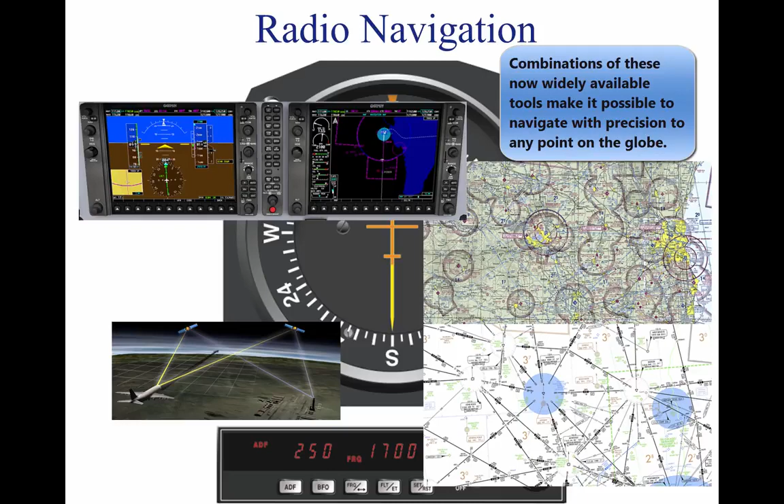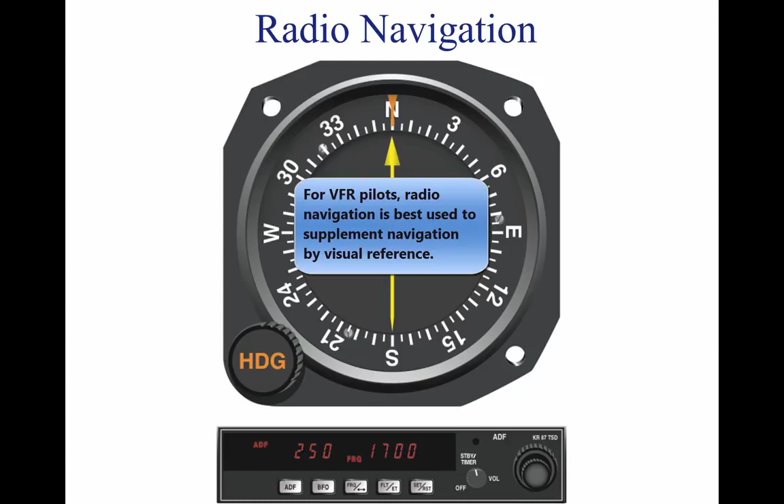Radio navigation. Advances in navigational radio receivers installed in aircraft, the development of aeronautical charts which show the exact location of ground transmitting stations and their frequencies, along with refined flight deck instrumentation, make it possible for pilots to navigate with precision to almost any point desired. Although precision in navigation is obtainable through the proper use of this equipment, beginning pilots should use this equipment to

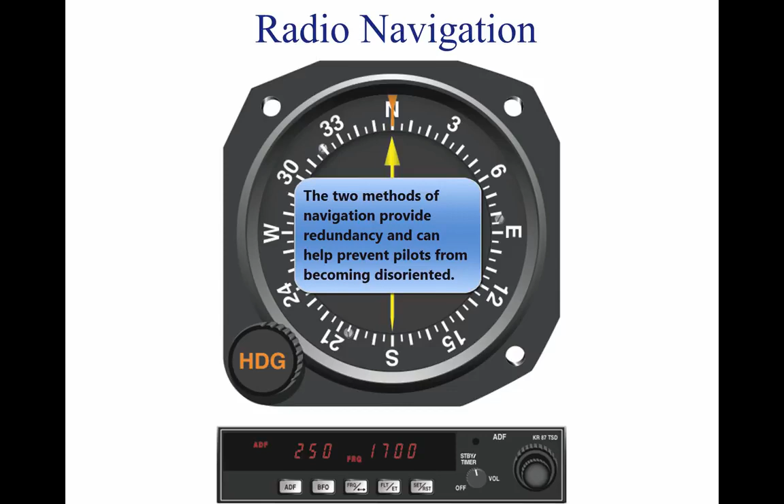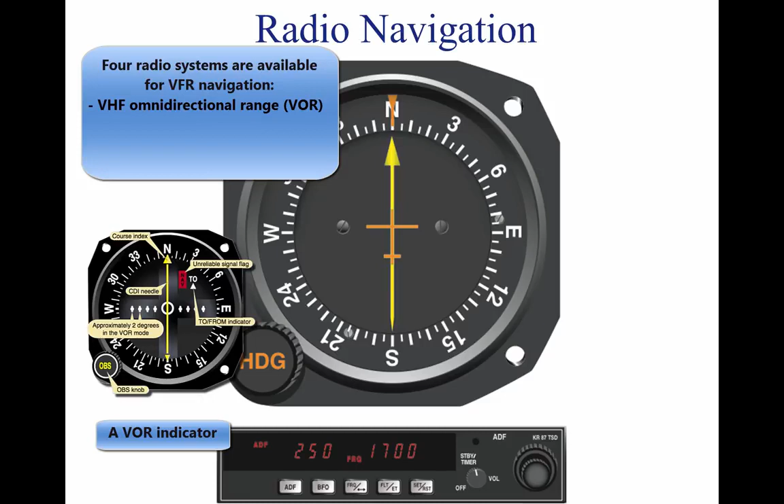supplement navigation by visual reference to the ground, pilotage. This method provides the pilot with an effective safeguard against disorientation in the event of radio malfunction. There are 4 radio navigation systems available for use for VFR navigation. These are VHF Omnidirectional Range (VOR), Non-Directional Radio Beacon (NDB), Long Range Navigation (LORAN-C), and Global Positioning System (GPS).

Very High Frequency, VHF Omnidirectional Range, VOR. The VOR system is present in 3 slightly different navigation aids, NavAids: VOR, VOR-DME, and VORTAC. By itself, it is known as a VOR, and it provides magnetic bearing information to and from the station. When DME is also installed with a VOR, the NavAid is referred to as a VOR-DME. When military tactical air navigation, TACAN equipment is installed with a VOR, the NavAid is known as a VORTAC. DME is always an integral part of a VORTAC.

Regardless of the type of NavAid utilized, VOR, VOR-DME, or VORTAC, the VOR indicator behaves the same. Unless otherwise noted in this section, VOR, VOR-DME, and VORTAC NavAids are all referred to hereafter as VORs.

The prefix omni means all, and an omnidirectional range is a VHF radio transmitting ground station that projects straight-line courses, or radials, from the station in all directions. From a top view, it can be visualized as being similar to the spokes from the hub of a wheel. The distance VOR radials are projected depends upon the power output of the transmitter.

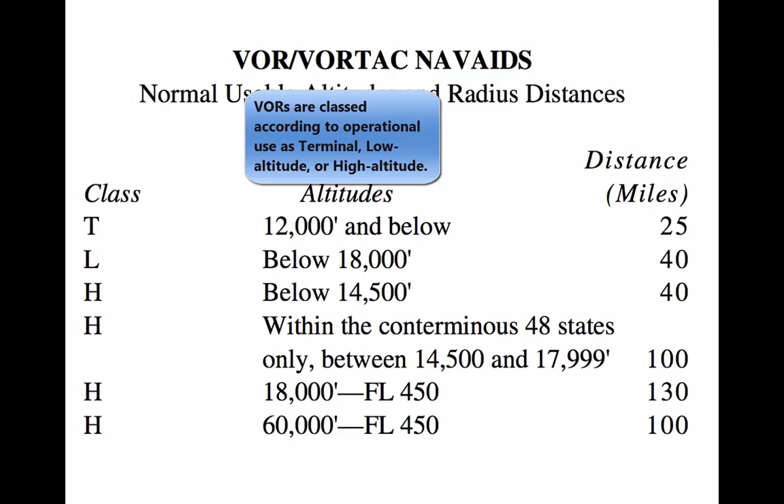VORs and VORTACs are classed according to operational use. There are 3 classes: T, terminal; L, low altitude; and H, high altitude. The normal useful range for the various classes is shown in this table. The useful range of certain facilities may be less than 50 miles. For further information concerning these restrictions, refer to the Communication NavAid remarks in the AFD.

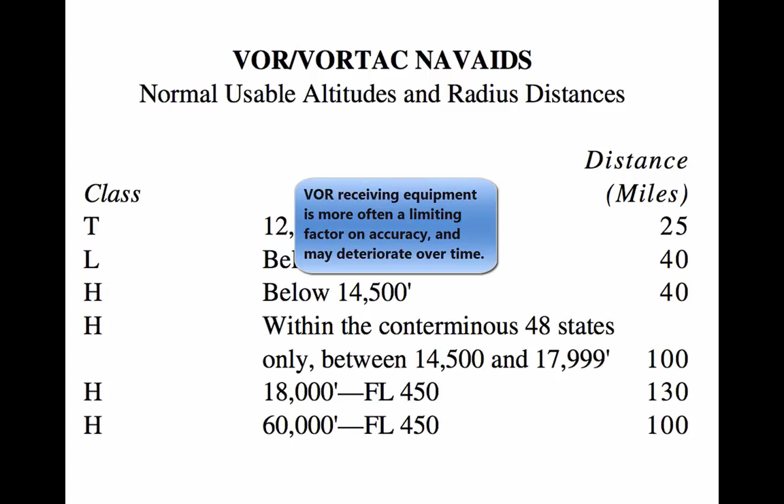The accuracy of course alignment of VOR radials is considered to be excellent. It is generally within plus or minus 1 degree. However, certain parts of the VOR receiver equipment deteriorate, and this affects its accuracy. This is particularly true at great distances from the VOR station. The best assurance of maintaining an accurate VOR receiver is periodic checks and calibrations.

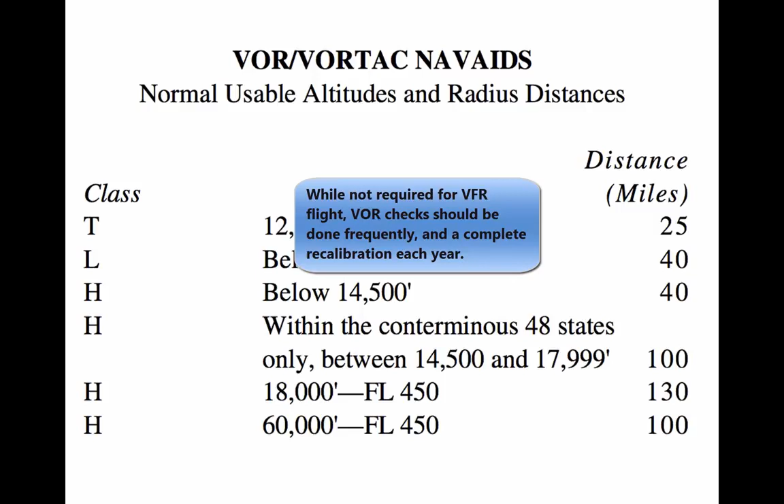VOR accuracy checks are not a regulatory requirement for VFR flight. However, to assure accuracy of the equipment, these checks should be accomplished quite frequently, with a complete calibration each year.

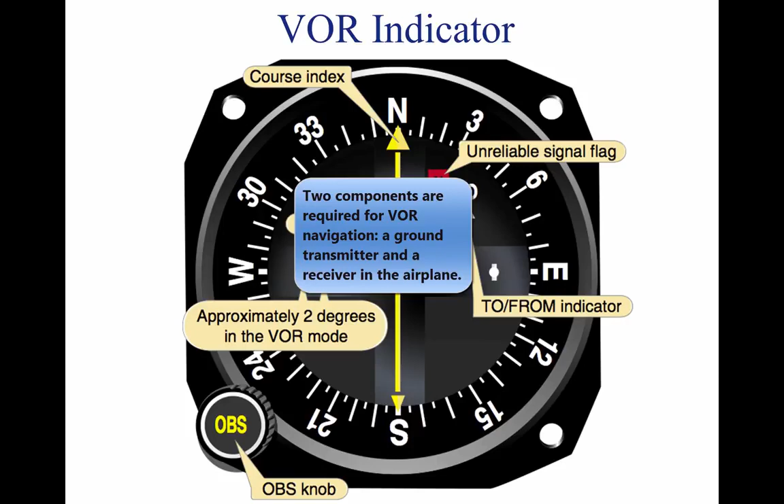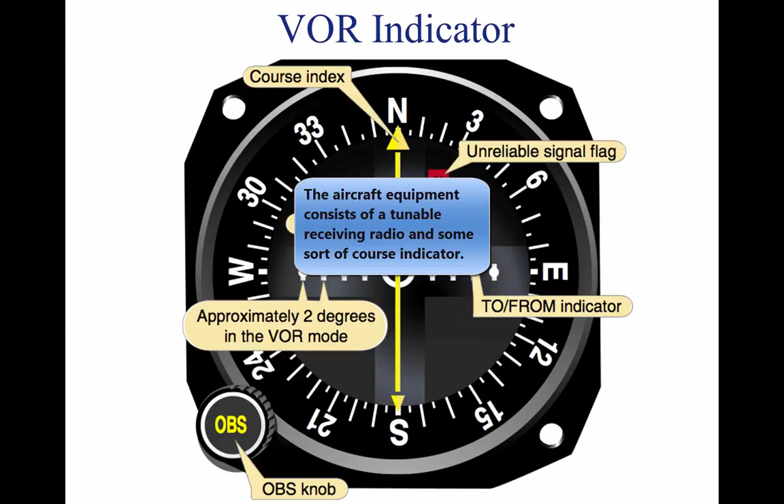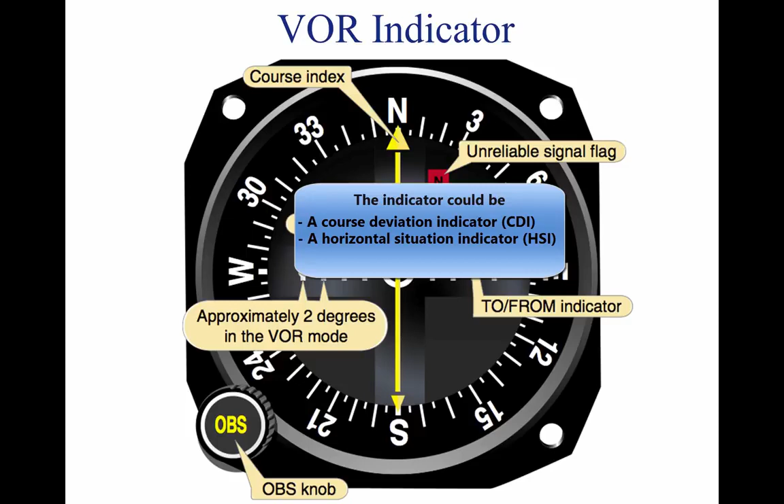Using the VOR. In review, for VOR radio navigation, there are two components required: ground transmitter and aircraft receiving equipment. The ground transmitter is located at a specific position on the ground and transmits on an assigned frequency. The aircraft equipment includes a receiver with a tuning device and a VOR or Omni navigation instrument. The navigation instrument could be a course deviation indicator (CDI), horizontal situation indicator (HSI), or a radiomagnetic indicator (RMI). Each of these instruments indicates the course to the tuned VOR.

Course deviation indicator. The CDI is found in most training aircraft. It consists of: 1. Omni bearing selector (OBS), sometimes referred to as the course selector, 2.

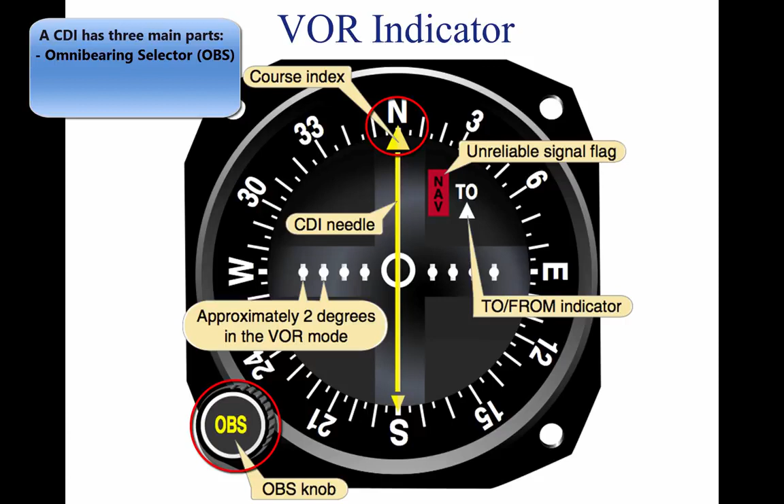A CDI needle, left-right needle, and a to-from indicator. The course selector is an azimuth dial that can be rotated to select a desired radial, or to determine the radial over which the aircraft is flying. In addition, the magnetic course to or from the station can be determined.

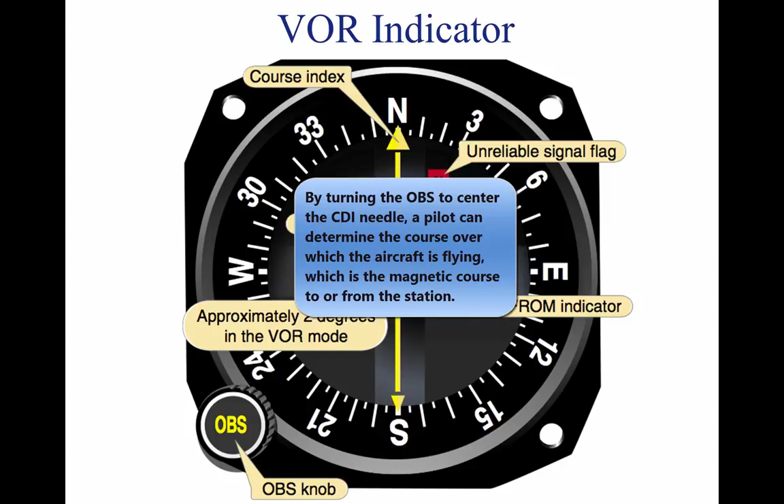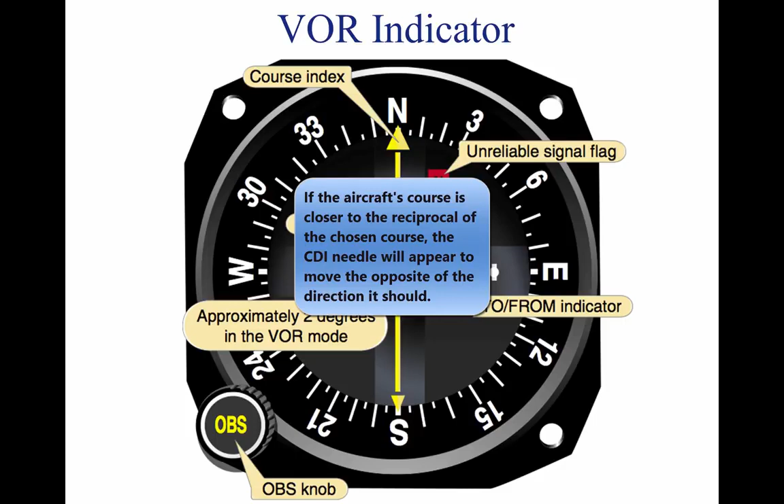When the course selector is rotated, it moves the CDI or needle to indicate the position of the radial relative to the aircraft. If the course selector is rotated until the deviation needle is centered, the radial, magnetic course from the station, or its reciprocal, magnetic course to the station, can be determined.

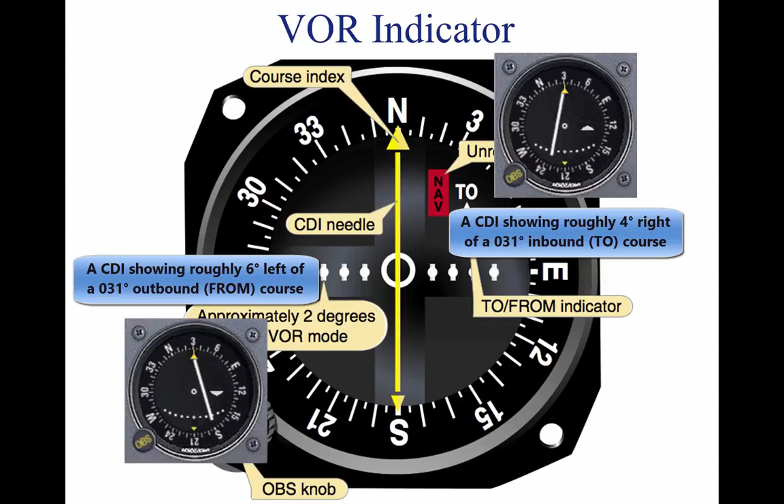The course deviation needle also moves to the right or left if the aircraft is flown or drifting away from the radial, which is set in the course selector. By centering the needle, the course selector indicates either the course from the station or the course to the station.

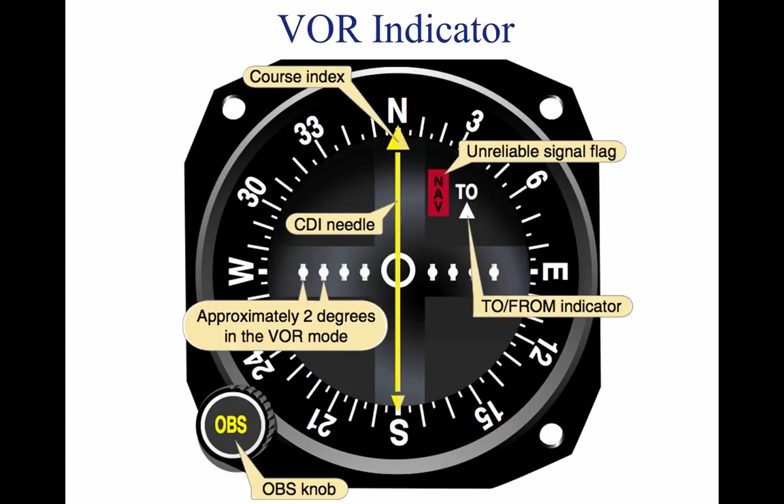If the flag displays a 'to,' the course shown on the course selector must be flown to the station. If 'from' is displayed and the course shown is followed, the aircraft is flown away from the station.

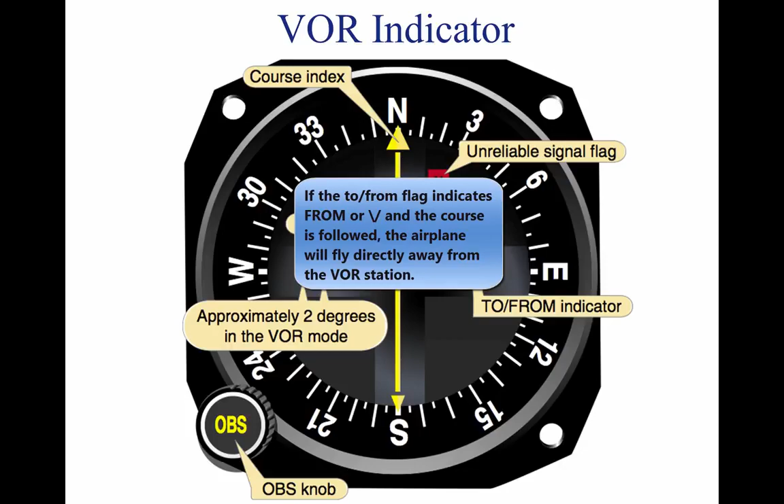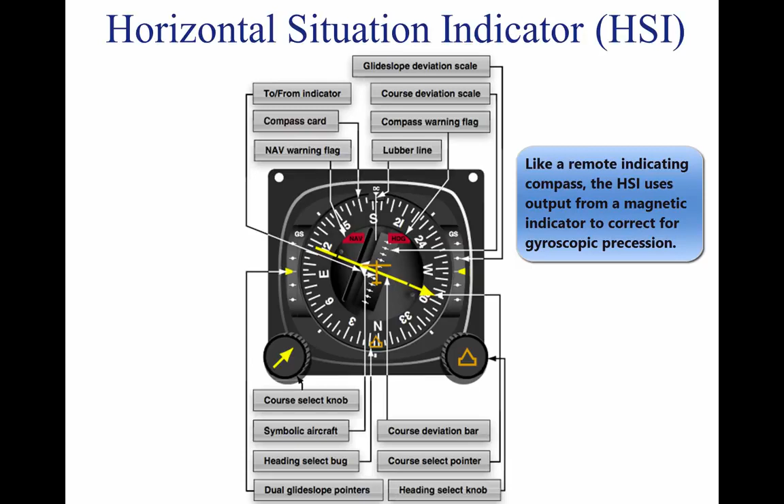Horizontal situation indicator. The HSI is a direction indicator that uses the output from a flux valve to drive the compass card. The HSI combines the magnetic compass with navigational signals and a glide slope.

The HSI gives the pilot an indication of the location of the aircraft with relationship to the chosen course or radial. In this figure, the aircraft magnetic heading displayed on the compass card under the lubber line is 184 degrees. The course select pointer shown is set to 295 degrees. The tail of the pointer indicates the reciprocal, 115 degrees.

The course deviation bar operates with a VOR, localizer, or GPS navigation receiver to indicate left or right deviations from the course selected with the course select pointer. Operating in the same manner, the angular movement of a conventional VOR/LOC needle indicates deviation from course.

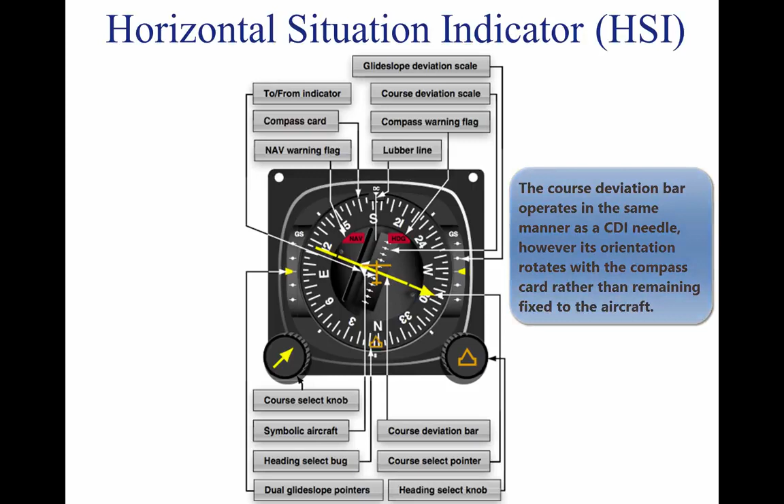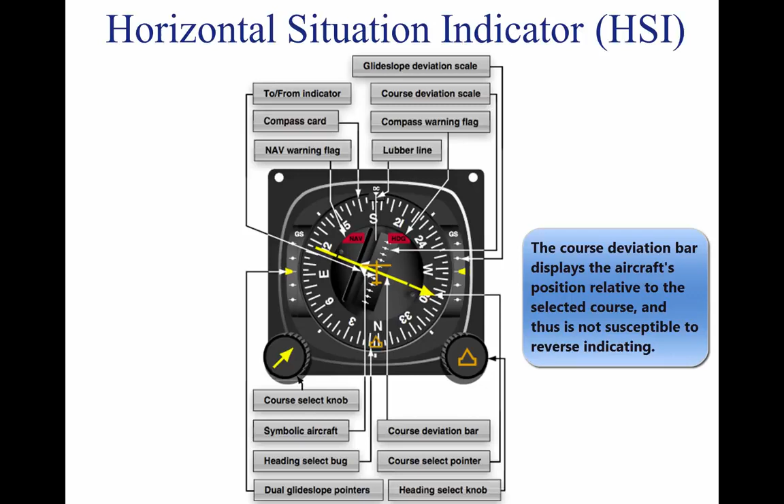The desired course is selected by rotating the course select pointer in relation to the compass card by means of the course select knob. The HSI has a fixed aircraft symbol, and the course deviation bar displays the aircraft's position relative to the selected course.

The to-from indicator is a triangular pointer. When the indicator points to the head of the course select pointer, the arrow shows the course selected. If properly intercepted and flown, the course will take the aircraft to the chosen facility.

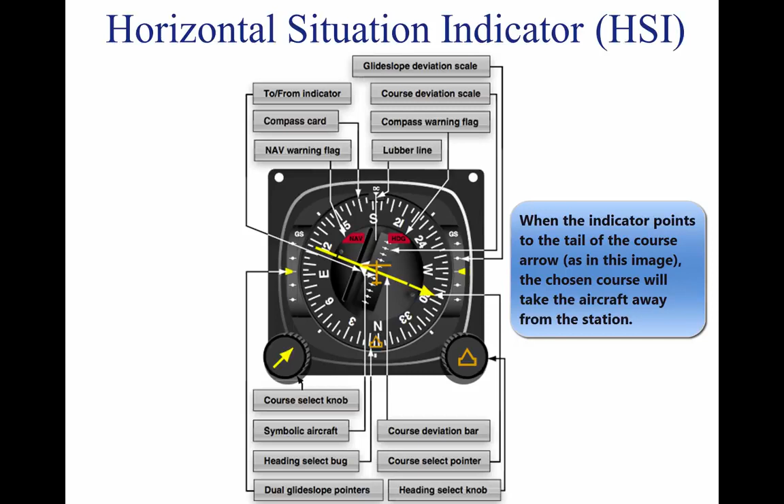When the indicator points to the tail of the course, the arrow shows that the course selected, if properly intercepted and flown, will take the aircraft directly away from the chosen facility.

When the nav warning flag appears, it indicates no reliable signal is being received. The appearance of the heading flag indicates the compass card is not functioning properly.

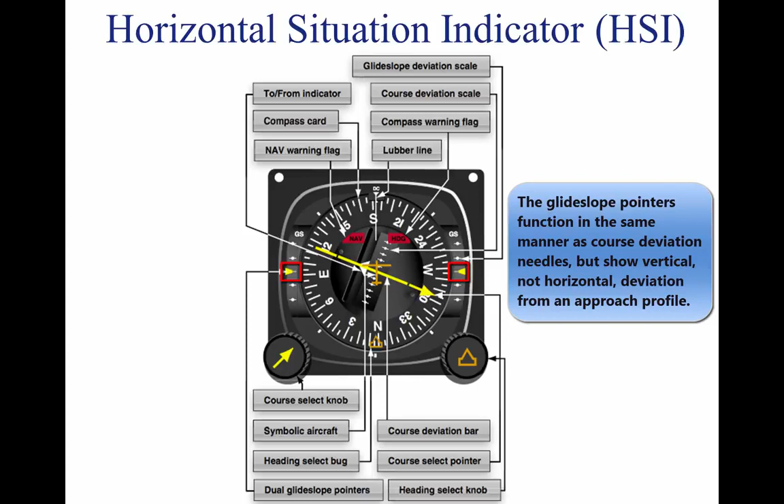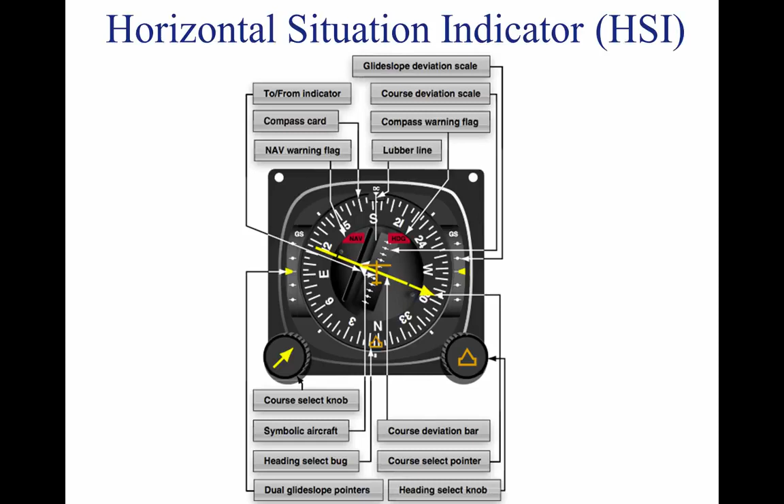The glide slope pointer indicates the relation of the aircraft to the glide slope. When the pointer is below the center position, the aircraft is above the glide slope, and an increased rate of descent is required. In some installations, the azimuth card is a remote indicating compass.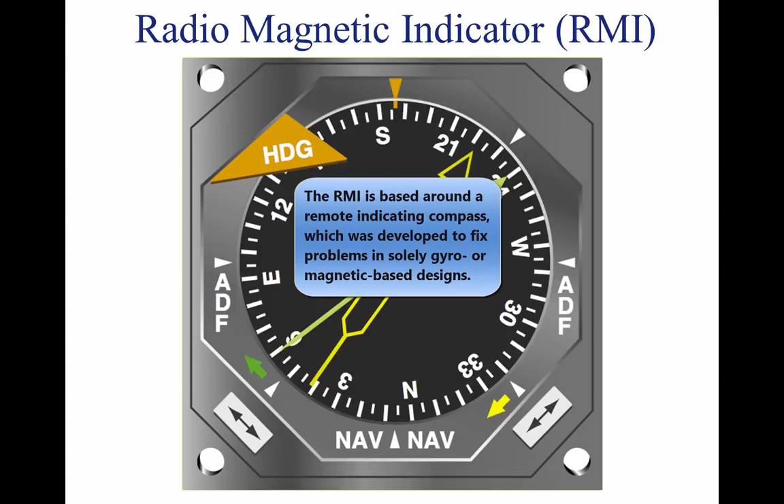Remote indicating compasses were developed to compensate for errors in and limitations of older types of heading indicators. The remote compass transmitter is a separate unit, usually mounted in a wingtip, to eliminate the possibility of magnetic interference. The RMI consists of a compass card, a heading index, two bearing pointers, and pointer function switches.

The two pointers are driven by any two combinations of a GPS, an ADF, and/or a VOR. The pilot has the ability to select the navigation aid to be indicated. The pointer indicates course to the selected nav aid or waypoint.

In this figure, the green pointer is indicating the station tuned on the ADF. The yellow pointer is indicating the course to a VOR or GPS waypoint. Note that there is no requirement for a pilot to select course with the RMI, but only the nav aid is to be indicated.

Tracking with VOR. The following describes a step-by-step procedure to use when tracking to and from a VOR station using a CDI. This figure illustrates the procedure.

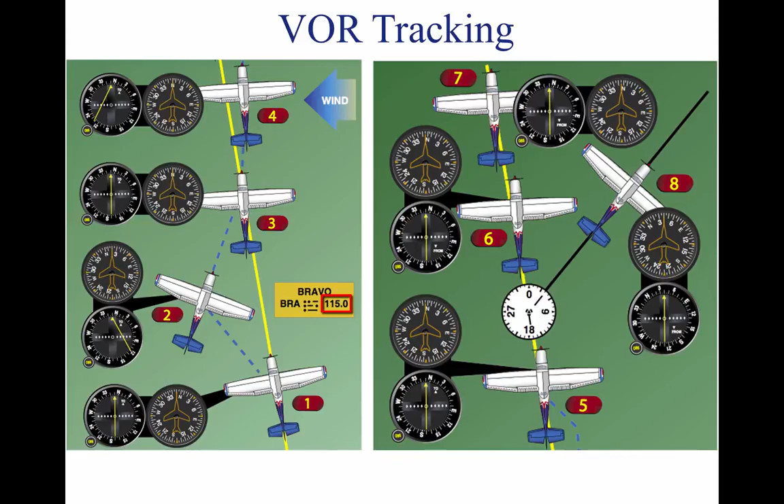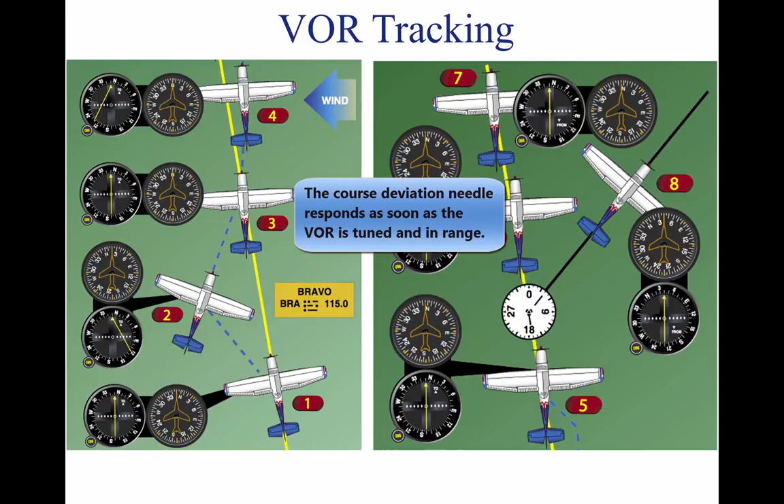First, tune the VOR receiver to the frequency of the selected VOR station, for example 115.0 to receive Bravo VOR. Next, check the identifiers to verify that the desired VOR is being received. As soon as the VOR is properly tuned, the course deviation needle deflects either left or right.

Rotate the azimuth dial to the course selector until the course deviation needle centers and the to-from indicator indicates to. If the needle centers with a from indication, the azimuth should be rotated 180 degrees, because in this case it is desired to fly to the station.

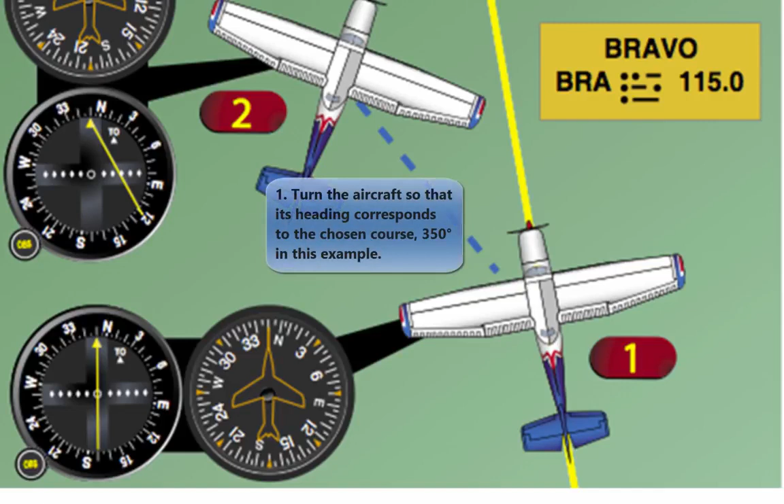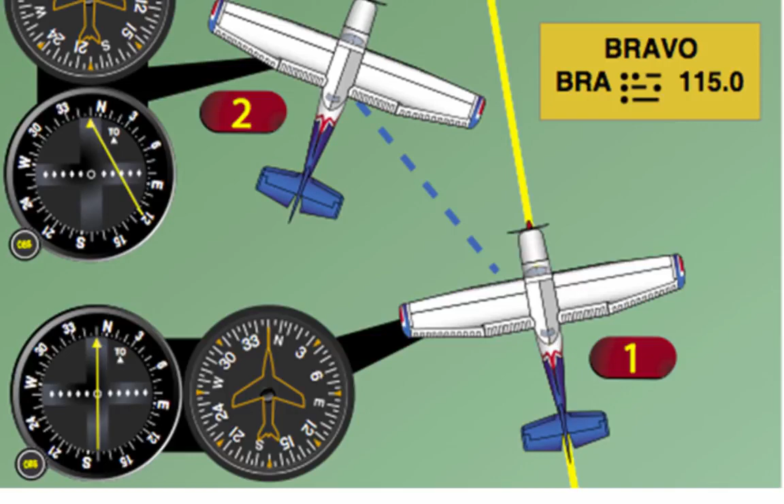Now turn the aircraft to the heading indicated on the VOR azimuth dial or course selector, 350 degrees in this example. If a heading of 350 degrees is maintained, with a wind from the right as shown, the aircraft drifts to the left of the intended track.

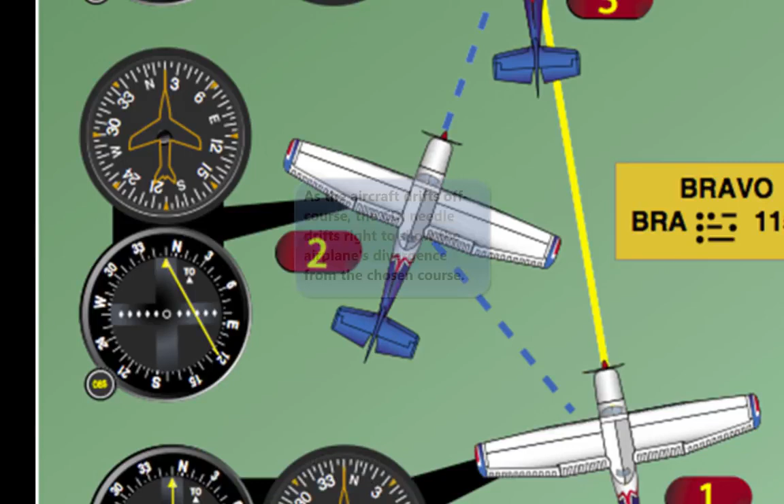As the aircraft drifts off course, the VOR course deviation needle gradually moves to the right of center, indicating the direction of the desired radial or track.

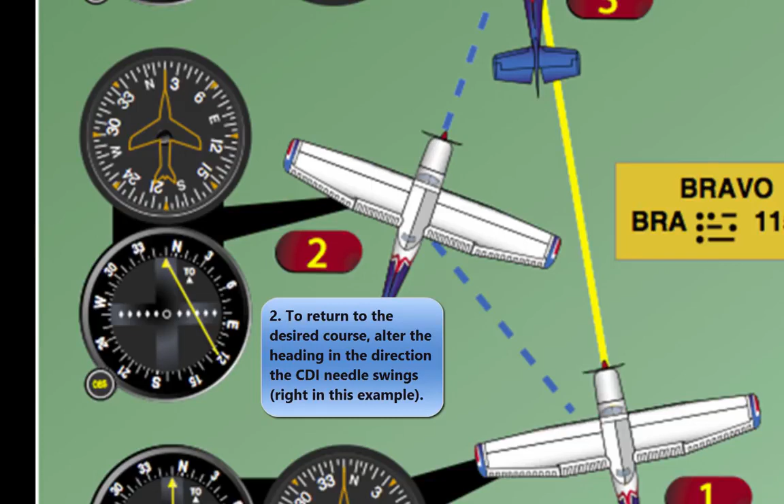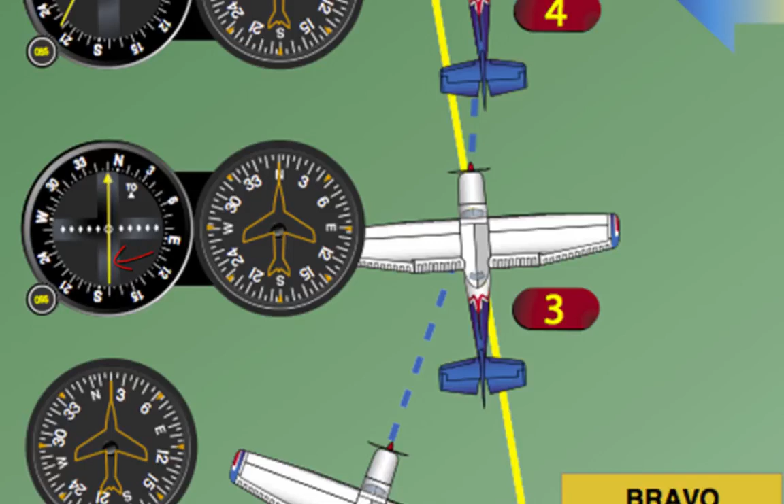To return to the desired radial, the aircraft heading must be altered to the right. As the aircraft returns to the desired track, the deviation needle slowly returns to center. When centered, the aircraft is on the desired radial, and a left turn must be made toward, but not to, the original heading of 360 degrees, because a wind drift correction must be established.

The amount of correction depends upon the strength of the wind. If the wind velocity is unknown, a trial and error method can be used to find the correct heading. Assume for this example a 10-degree correction for a heading of 10 degrees is maintained.

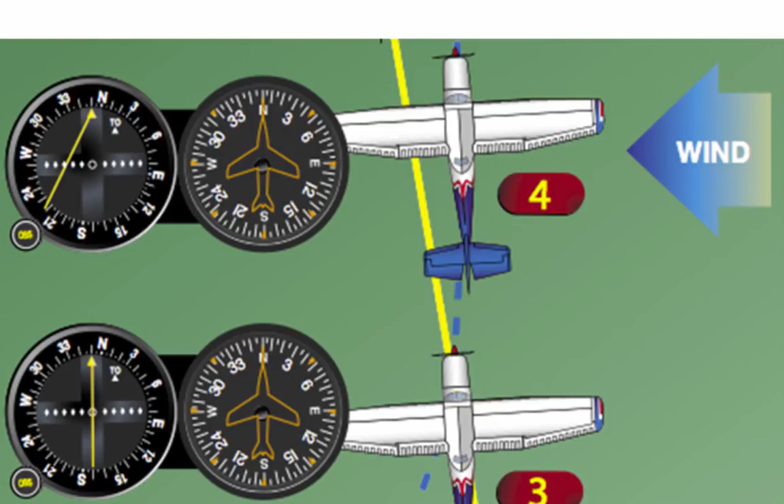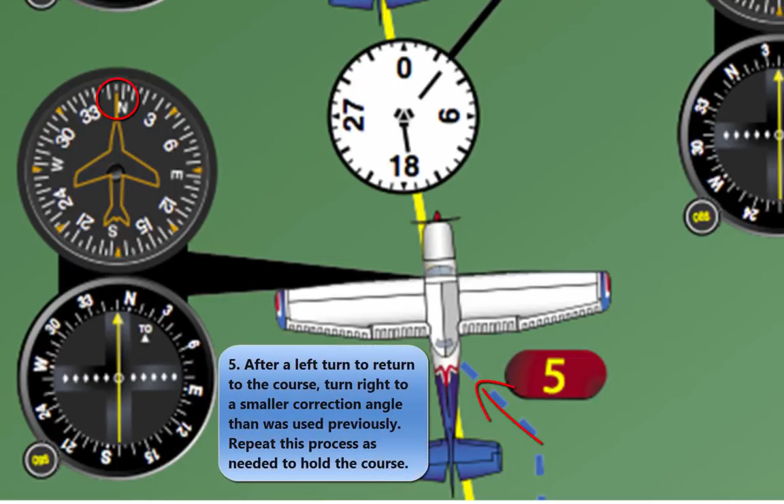While maintaining a heading of 10 degrees, assume that the course deviation begins to move to the left. This means that the wind correction of 10 degrees is too great, and the aircraft is flying to the right of course. A slight turn to the left should be made to permit the aircraft to return to the desired radial.

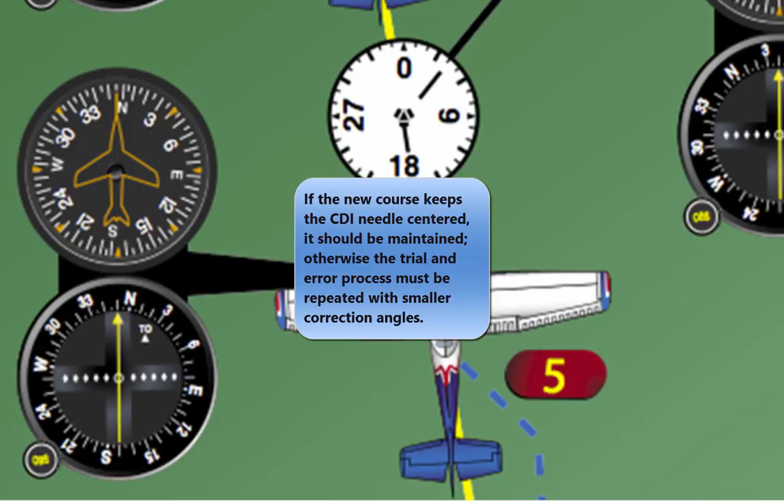When the deviation needle centers, a small wind drift correction of 5 degrees, or a heading correction of 5 degrees, should be flown. If this correction is adequate, the aircraft remains on the radial. If not, small variations in heading should be made to keep the needle centered and consequently keep the aircraft on the radial.

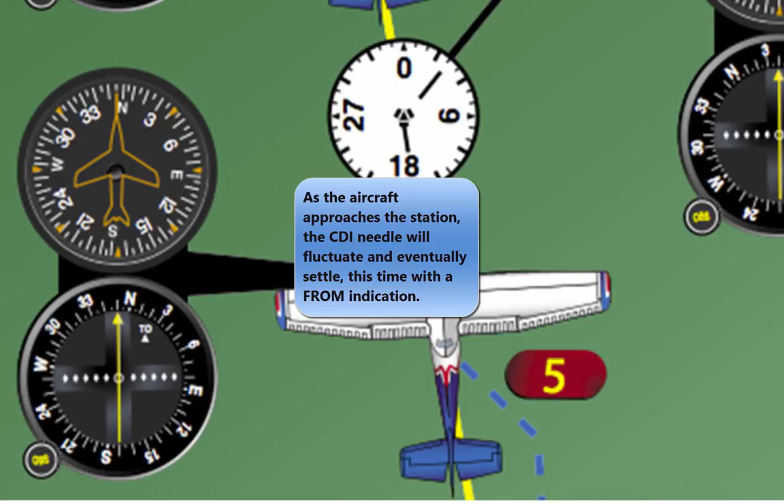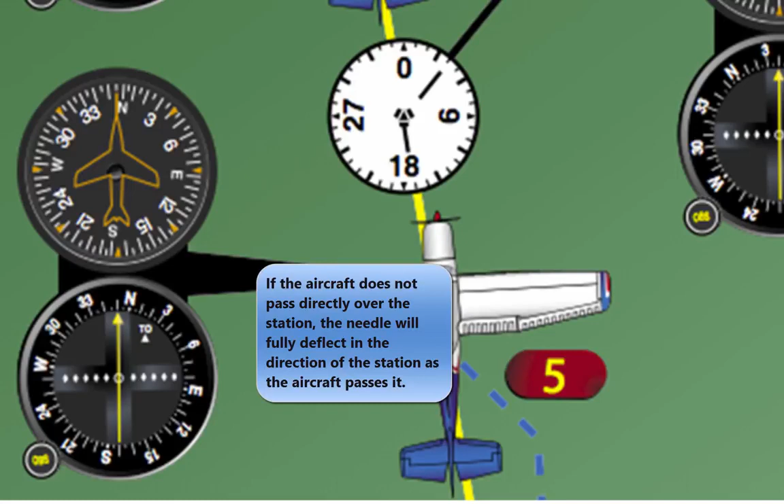As the VOR station is passed, the course deviation needle fluctuates, then settles down, and the to indication changes to from. If the aircraft passes to one side of the station, the needle deflects in the direction of the station as the indicator changes to from.

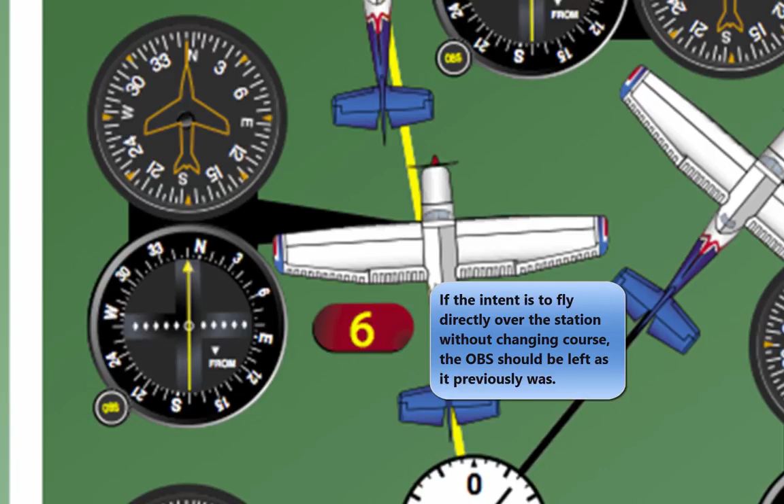Generally, the same techniques apply when tracking outbound as those used for tracking inbound. If the intent is to fly over the station and track outbound on the reciprocal of the inbound radial, the course selector should not be changed. Corrections are made in the same manner to keep the needle centered. The only difference is that the omnidirectional range indicator indicates from.

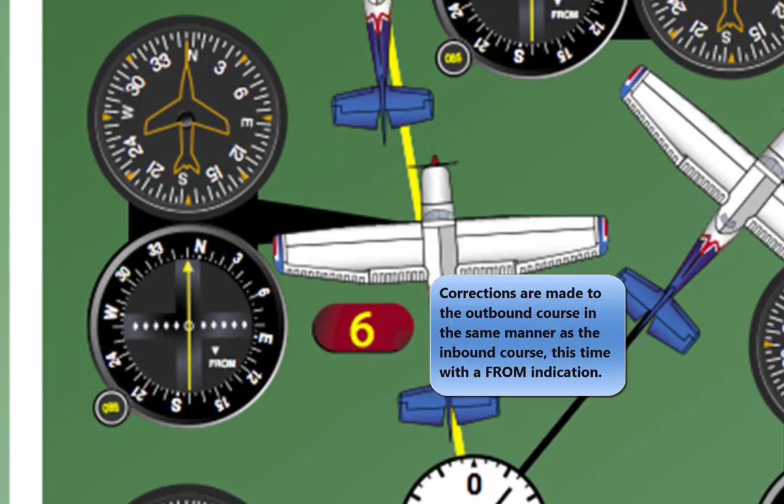If tracking outbound on a course other than the reciprocal of the inbound radial, this new course or radial must be set in the course selector and a turn made to intercept this course. After this course is reached, tracking procedures are the same as previously discussed.

Tips on using the VOR. Positively identify the station by its code or voice identification.

Keep in mind that VOR signals are line of sight. A weak signal or no signal at all is received if the aircraft is too low or too far from the station. When navigating to a station, determine the inbound radial and use this radial.

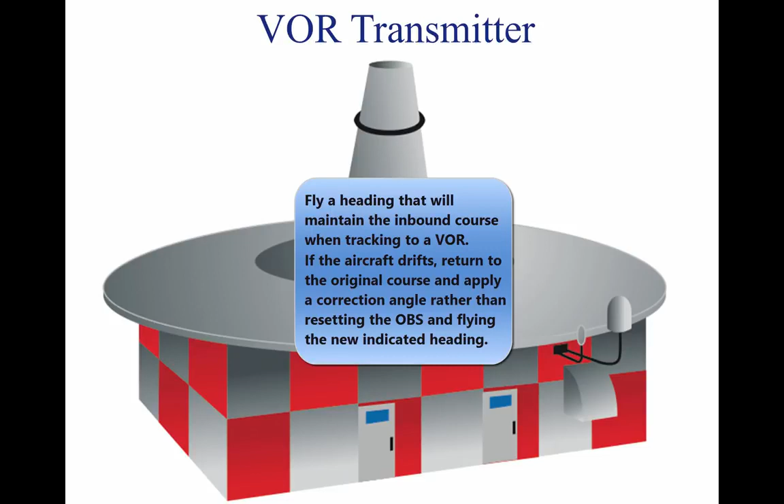Fly a heading that will maintain the course. If the aircraft drifts, fly a heading to re-intercept the course, then apply a correction to compensate for wind drift. If minor needle fluctuations occur, avoid changing headings immediately. Wait momentarily to see if the needle recenters. If it does not, then correct.

When flying to a station, always fly the selected course with a to indication. When flying from a station, always fly the selected course with a from indication.

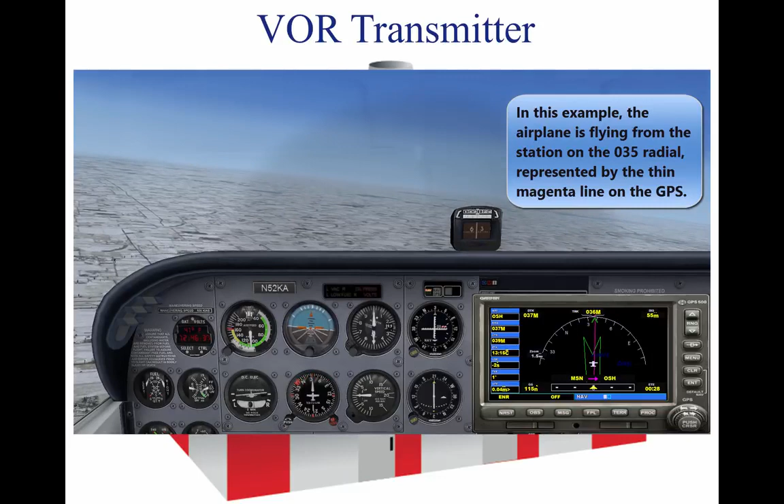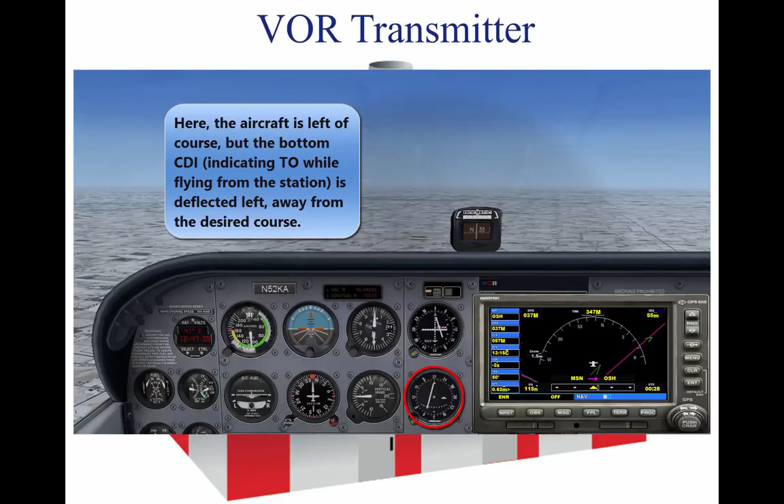If this is not done, the action of the course deviation needle is reversed. To further explain this reverse action, if the aircraft is flown toward the station with a FROM indication, or away from the station with a TO indication, the course deviation needle indicates in a direction opposite to that which it should indicate. For example, if the aircraft drifts to the right of a radial being flown, the needle moves to the right, or points away from the radial. If the aircraft drifts to the left of the radial being flown, the needle moves left, or in the direction opposite to the radial.

When navigating using the VOR, it is important to fly headings that maintain or re-intercept the course. Just turning toward the needle will cause overshooting the radial and flying an S-turn to the left and right of course.

Course intercept. Course interceptions are performed in most phases of instrument navigation. The equipment used varies, but an intercept heading must be flown that results in an angle or rate of intercept sufficient to solve a particular problem.

Rate of intercept. Rate of intercept, seen by the aviator as bearing pointer or HSI movement, is a result of the following factors: the angle at which the aircraft is flown toward a desired course (angle of intercept), true airspeed and wind, and distance from the station.

Angle of intercept. The angle of intercept is the angle between the heading of the aircraft, intercept heading, and desired course. Controlling this angle by selection and adjustment of the intercept heading is the easiest and most effective way to control course interceptions. Angle of intercept must be greater than the degrees from course, but should not exceed 90 degrees. Within this limit, adjust to achieve the most desirable rate of intercept.

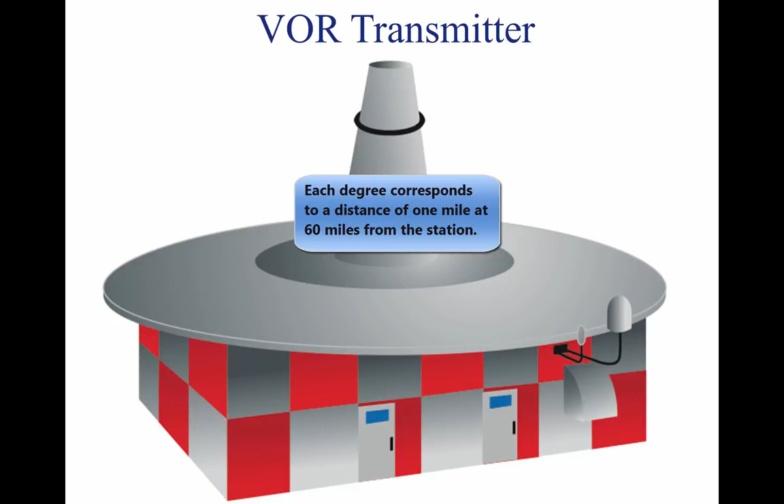When selecting an intercept heading, the key factor is the relationship between distance from the station and degrees from the course. Each degree of radial is 1 nautical mile wide at a distance of 60 nautical miles from the station. Width increases or decreases in proportion to the 60 nautical mile distance. For example, 1 degree is 2 nautical miles wide at 120 nautical miles, and 1/2 nautical mile wide at 30 nautical miles. For a given ground speed and angle of intercept, the resultant rate of intercept varies according to the distance from the station.

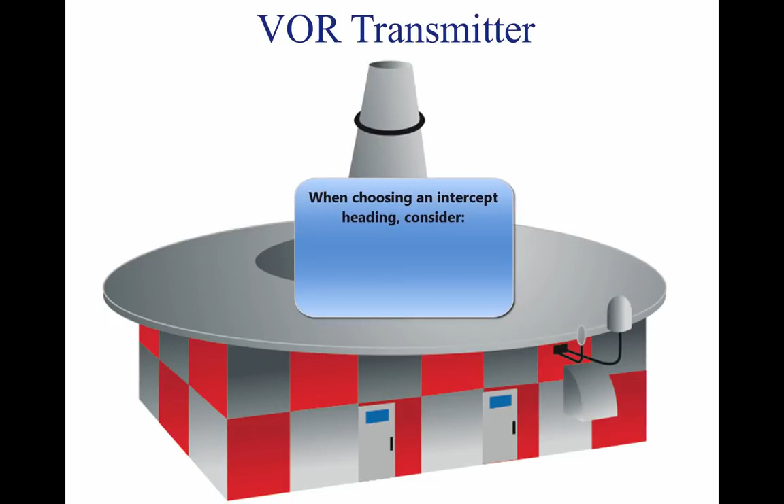When selecting an intercept heading to form an angle of intercept, consider the following factors: degrees from course, distance from the station, and true airspeed and wind.

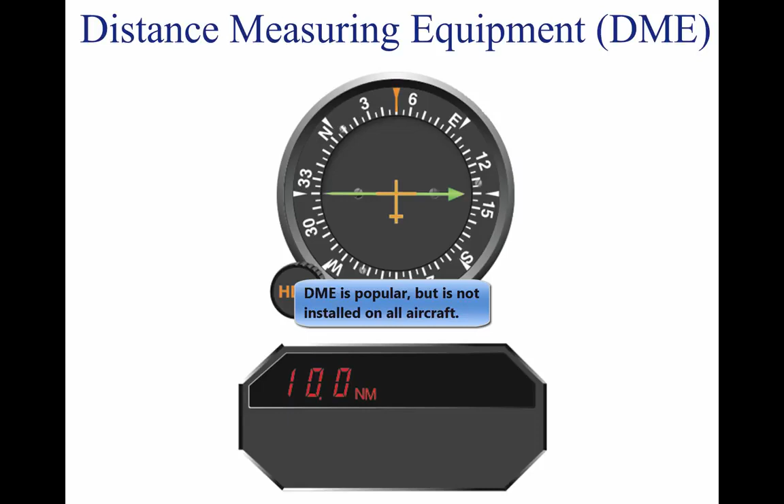Distance measuring equipment, DME, consists of an ultra-high-frequency navigational aid present with VOR DMEs and VORTACs. It measures, in nautical miles, the slant range distance of an aircraft from a VOR DME or VORTAC, both hereafter referred to as a VORTAC. Although DME equipment is very popular, not all aircraft are DME equipped. To utilize DME, the pilot should select, tune, and identify a VORTAC as previously described.

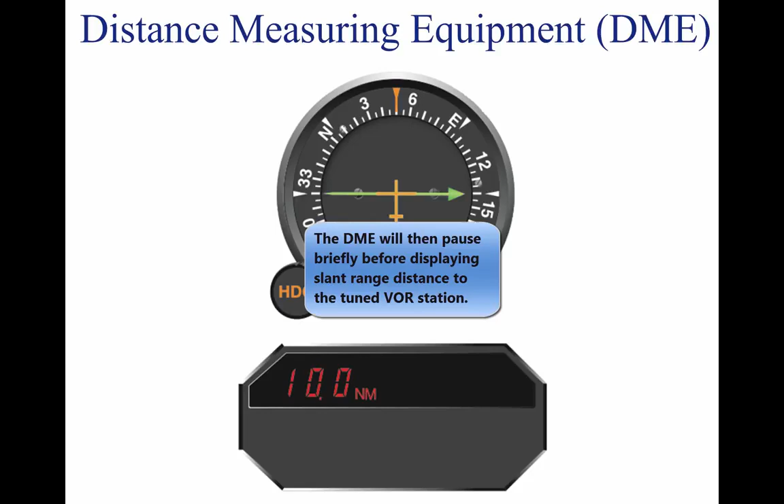The DME receiver, utilizing what is called a paired frequency concept, automatically selects and tunes the UHF DME frequency associated with the VHF VORTAC frequency selected by the pilot. This process is entirely transparent to the pilot. After a brief pause, the DME display shows the slant range distance to or from the VORTAC.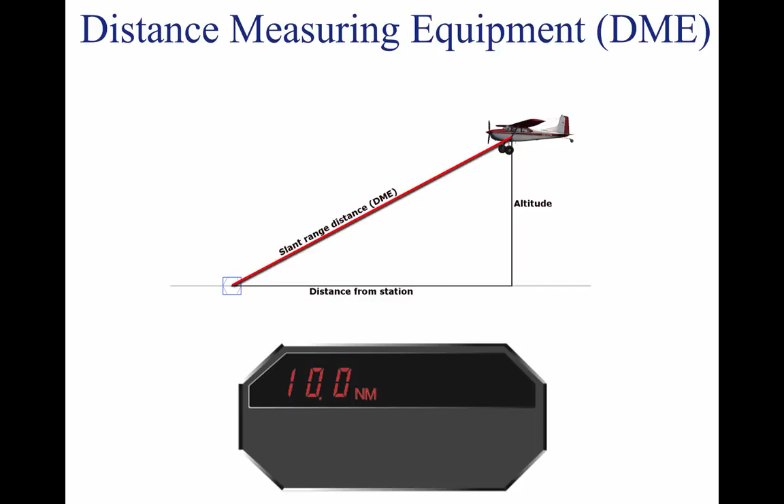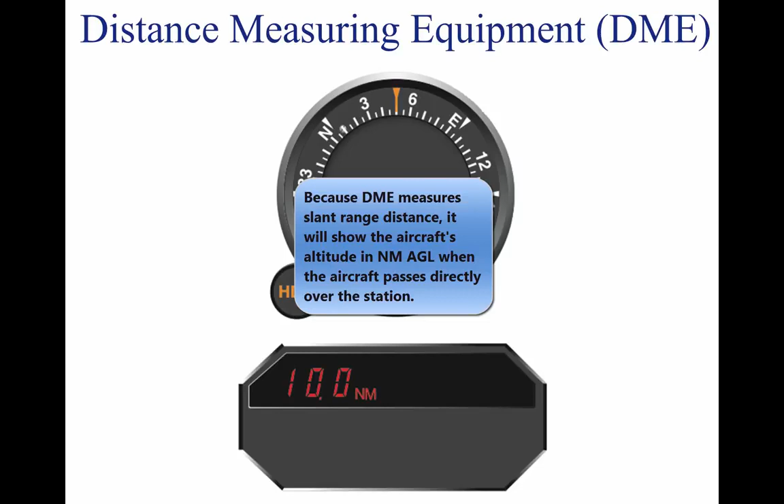Slant range distance is the direct distance between the aircraft and the VORTAC, and is therefore affected by aircraft altitude. Station passage directly over a VORTAC from an altitude of 6,076 feet above ground level, AGL, would show approximately 1.0 nautical miles on the DME.

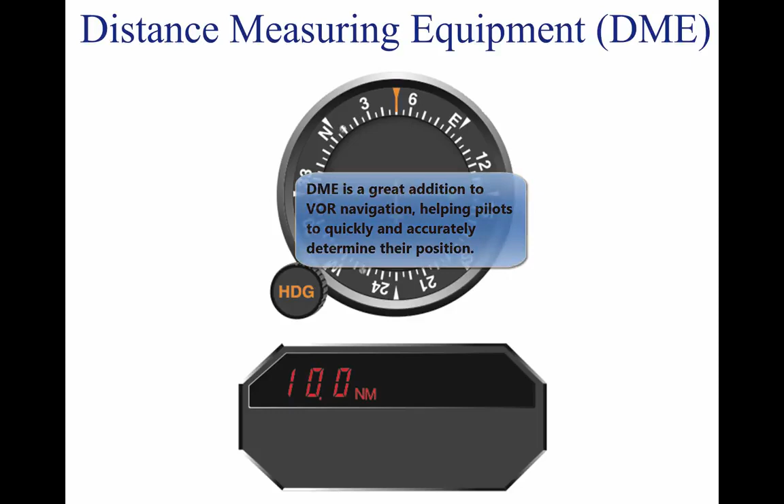DME is a very useful adjunct to VOR navigation. A VOR radial alone merely gives line of position information. With DME, a pilot may precisely locate the aircraft on that line or radial.

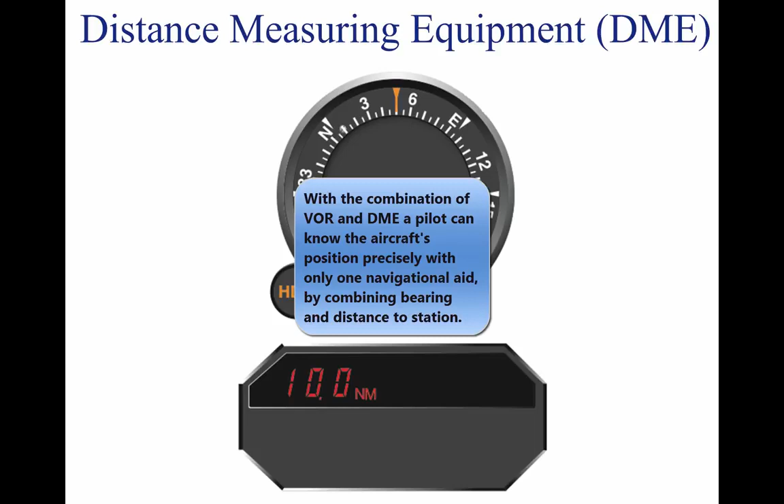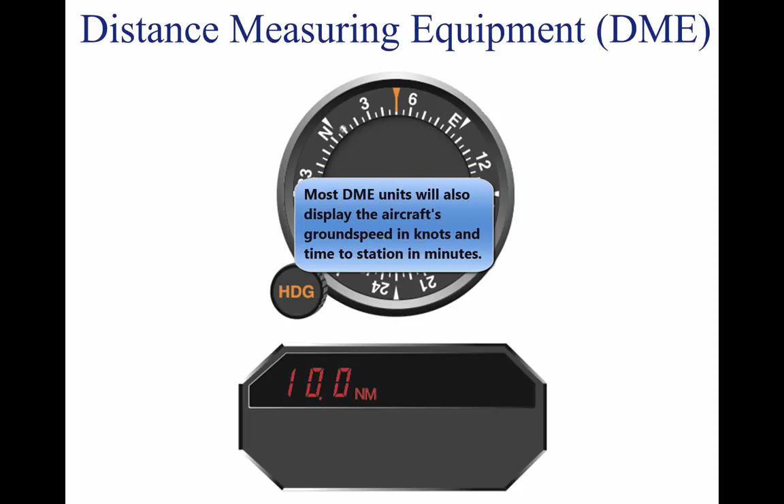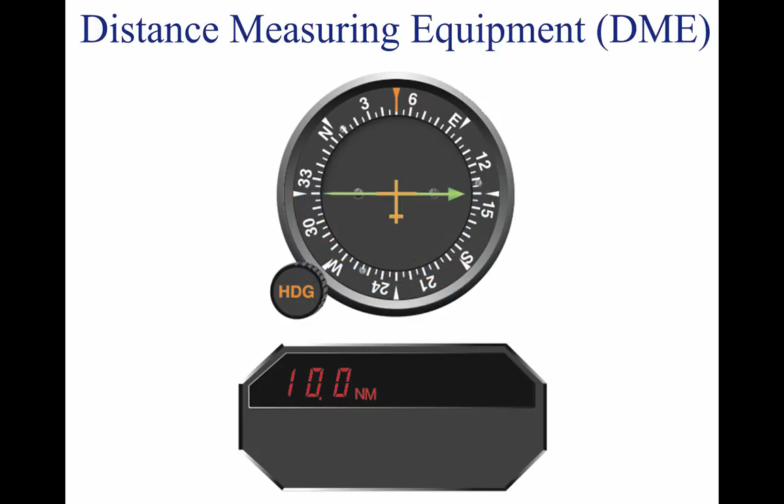Most DME receivers also provide ground speed and time to station modes of operation. The ground speed is displayed in knots, NMPH. The time to station mode displays the minutes remaining to VORTAC station passage, predicated upon the present ground speed. Ground speed and time to station information is only accurate when tracking directly to or from a VORTAC. DME receivers typically need a minute or two of stabilized flight directly to or from a VORTAC before displaying accurate ground speed or time to station information.